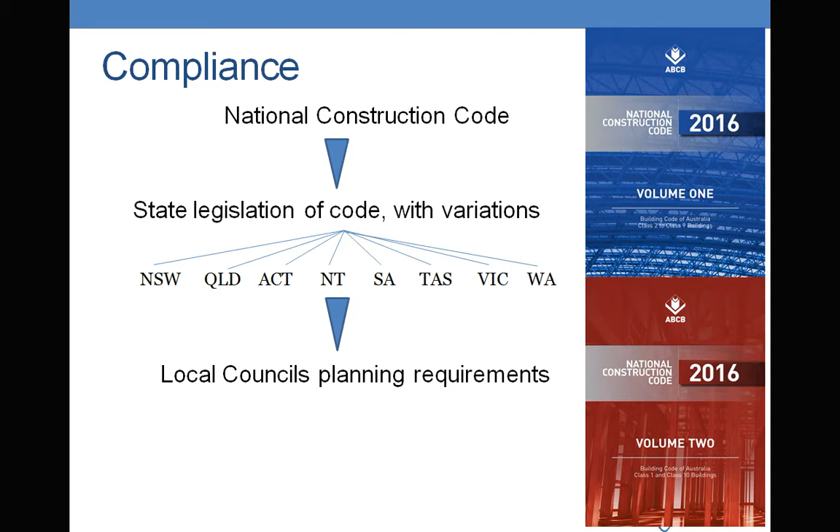So if we have a regulation, then what else do we need? We just build and everything will be done right. Unfortunately, the National Construction Code focuses on occupational health and safety. There's a small section on sustainability, section J, but the objective of the National Construction Code is about safety, about fire, about structural stability, about access when there's fire.

So, distances to exits, issues like that. So if I have a building, and at least I know it's not going to fall down, is that good enough? Not always, right? Because some clients want some quality. Some clients want the walls to be straight, not crooked. Some clients want the doors to have multiple uses and still be upright.

Example, a hotel, right? The door used in a hotel compared to a door used in a house is different. A door used in an education facility is different. So they have different levels of quality. And you as designers will have to make a decision, what quality do I want? So the specification is the document, it's the written word that outlines the quality.

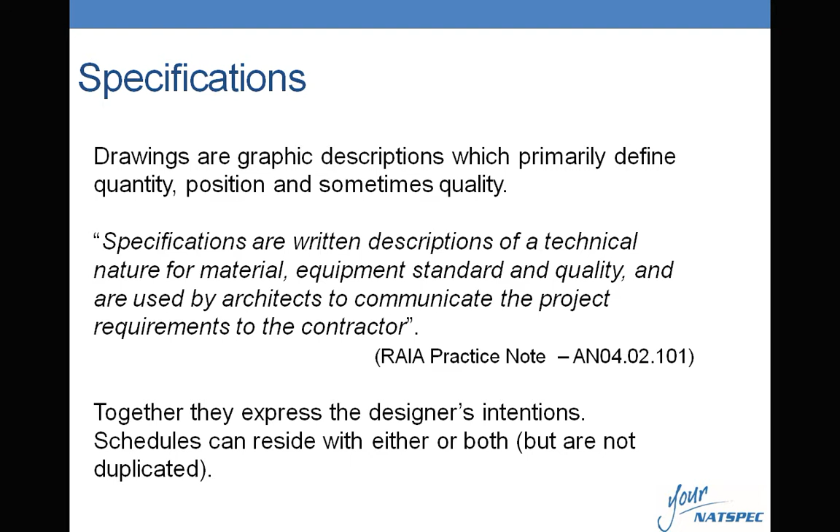Okay. So when you think of all the documentation, now including, say, the contract between your client and the builder, all of these things come together. They should not, under any circumstance, be in conflict, because every time there's something in conflict, it opens the door to what's called a variation, and every time there's a variation, there is an additional cost. So the main thing to remember is, in order to have quality, you must have a construction specification.

This is important. This is basically what I was saying, that it is about working with the other documents. It is about transferring your design thoughts onto paper. It is about complementing the drawings, not replacing the drawings, or the drawings not replacing the specification.

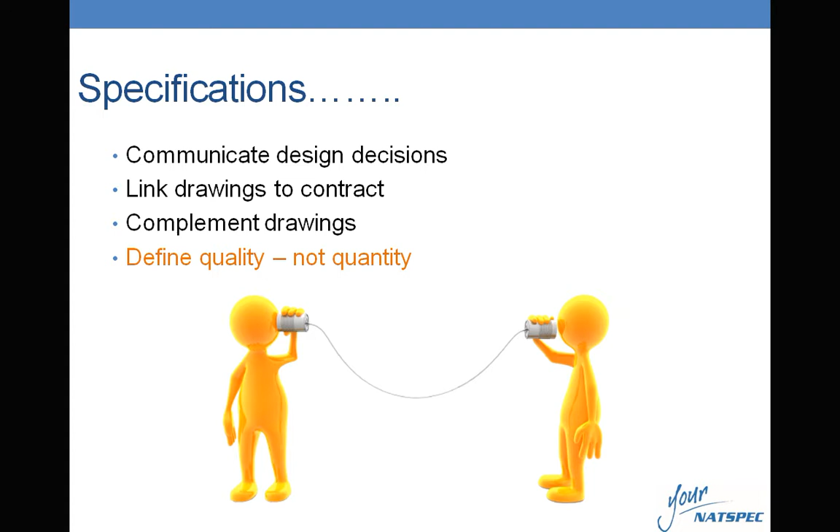Here's what, if any of you are going to become architects, note: you can finish architecture, and unless you're registered, you can't use the term architect. So if you're a registered architect, you will have to go through an examination, and part of that examination is on your documentation abilities. So it's important for you as a professional.

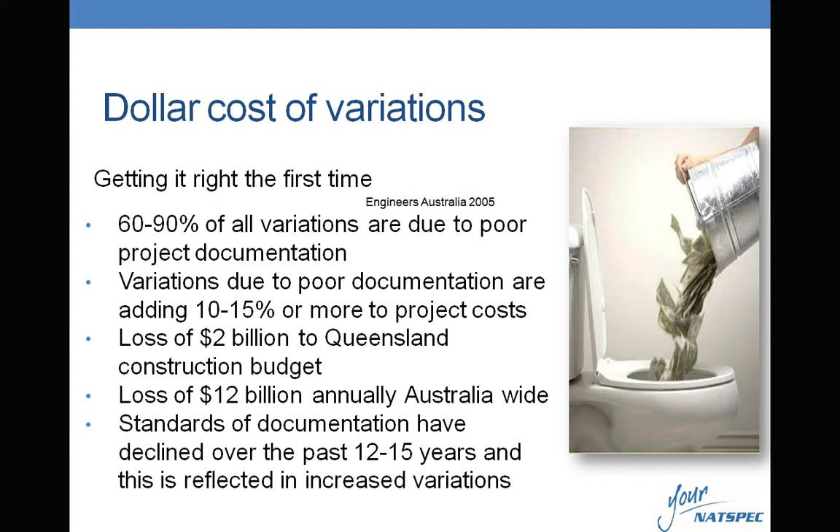So getting your documentation right saves money.

Okay, when you become an architect, or you're not one yet, when you will become one, you'll think back on what did I study? What were those subjects? Oh, we learned about windows and glazing, heat gain coefficients, or funny stuff like that. But what did you enjoy? You enjoyed drawing. Now, I don't even know if you do drawing nowadays. Maybe it's all BIM. You're doing BIM or you're doing drawings, or you do both? Both. Good on you. Right.

Playing around on computers is really not my thing. So drawing board's great. You do the drawing, you enjoy the drawing, right? And unfortunately, if something goes wrong, you go along to court and say, oh, I did these drawings, spent all my life on these drawings, and the court says, well, I'm sorry, the specification takes legal precedence over the drawings. That's a biggie, because as professionals, we tend to spend more time on the drawings, not on the specification. But in the eyes of the court, the specification takes precedence.

Why? John said this, I usually tell the story. In my family, both my sisters and my brother are lawyers. Anyone here know lawyers? Yeah, quite a few. No, you say the word lawyers and they smile. The reason is they're an argumentative lot. They can't agree on anything. So we have dinner and they're just bickering over a word. So their whole life is about words.

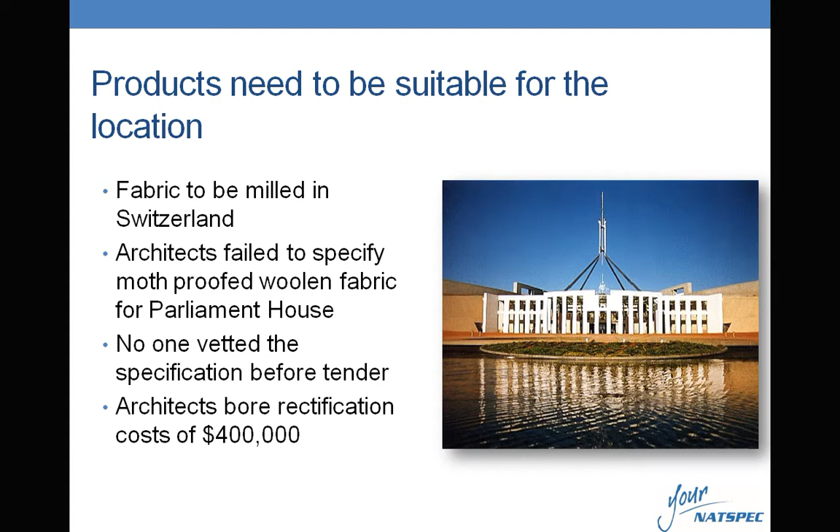So when you're using a proprietary product in your specification, is it appropriate for the location, is what you've got to ask. There are temperate zones, there are tropical zones, there are cold zones. You have to say, yes, I've got a lovely product, but is it suitable for this location?

The other thing you've got to think about is, can you get it in that location? So if you're designing a building in Darwin, or you're designing a building up in Cooktown, can the product get there quickly and economically? You'll have to think about that as part of your design decisions.

And the other thing is, even when you've chosen a product, you will have to allow for substitutions. Because let's say it's a really common product, but everyone's ordering it, and the builder comes back and says, well, if you want that product, we're going to have to wait for six months. You're going to sit there for six months doing nothing with a holding cost, and on big projects, it could be $1 million a month in interest payment. You're not going to sit around for six months waiting. You will need to look and work with the builder to find something to substitute.

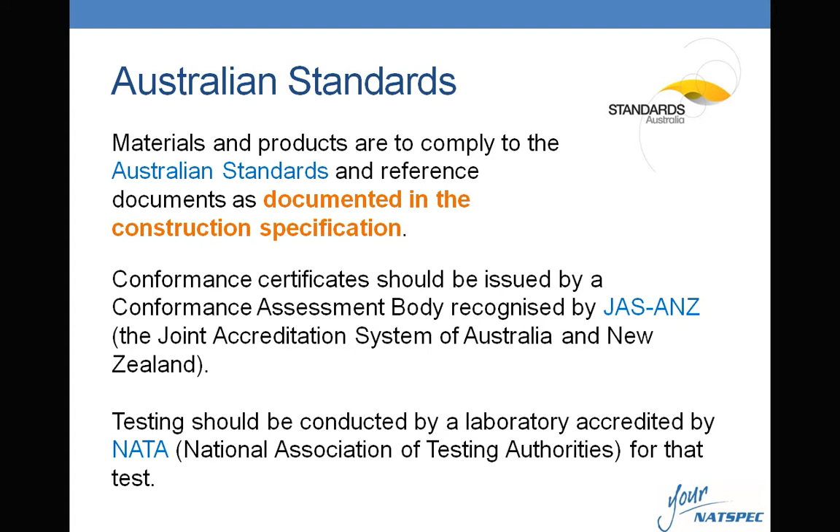So we reference Australian standards, we will reference industry documents, we will reference overseas standards as well, if that's necessary. When we call up a reference standard, we will put in there that we have the right to look at the test certificate or the conformance certificate for that product. Doesn't mean we look at them all, it just gives us the right to look at them. In Australia, the main conformance body to work around is JAS-ANZ, so they accredit conformance assessment bodies, and NATA, National Association of Testing Authorities, accredits laboratories. You can be a NATA accredited laboratory for this standard alone, so you've got to watch out. Someone can say, oh, we're NATA accredited, but not for the right standard, so you've got to be careful.

June last year - in fact, I was in the UK when that happened. And unfortunately, 71 people died. Now, in both instances, the cladding, or the cladding detail, contributed to the spread of fire. It didn't start the fire. There were a whole lot of other issues involved, but in both cases, it is clear that the cladding system contributed to the fire.

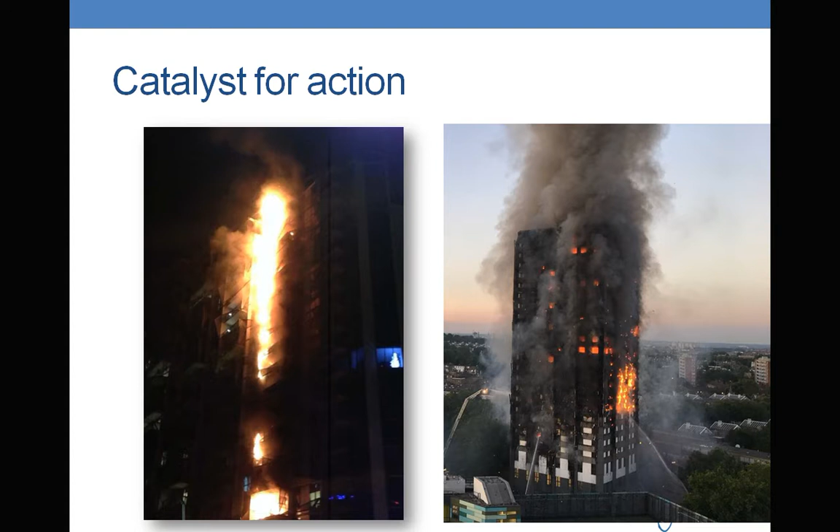Politicians will say it was the same - they're totally different, the detail was totally different, but it scared everyone. This one worried everyone, no one died. This one scared everyone. So I sit on government committees, and I can tell you, suddenly it became the main thing, and suddenly there was this focus on non-conformity.

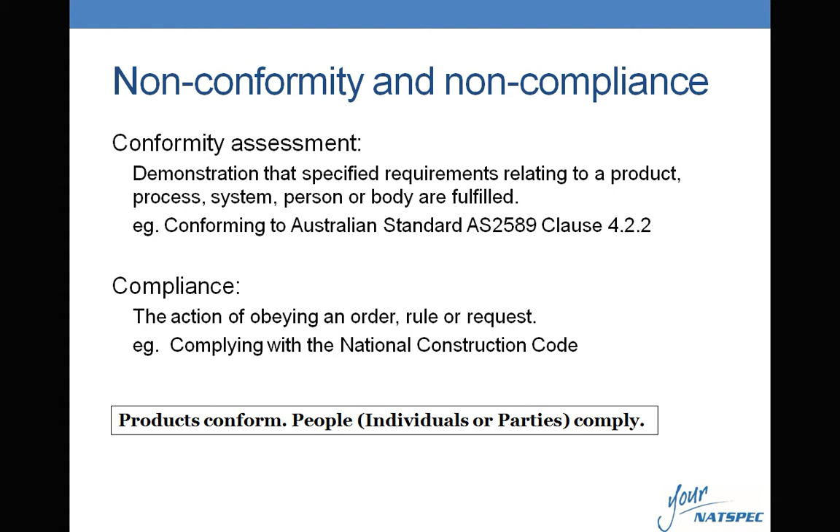So non-conformity, we're talking about products conforming, and non-compliance, we're talking about non-compliance to the National Construction Code. So it is a big issue with regard to substitution of products that either do not comply or do not conform. In your specification, you have the right to reject. So it becomes very important for you to document it correctly, and reference specifying is one of the cleanest ways to give you protection.

An example is this one - this is one of my projects. John knows this. Before I worked in architecture, I started in engineering. Okay, so the professions aren't always that friendly. So some say that I came from the dark side, others say I went to the dark side - it depends which hat you're wearing. So here's a project, I was, I think if I remember correctly, 2 years out of uni. By now, if you're observant, you would have seen that I'm Chinese.

So Chinese are very lucky, I can lie about my age all the time. But the trouble is, 2 years out of uni on a building site, I still look like I was 13. So you're trying to tell people what to do, and you had to learn how to make it work for you. This particular case, I designed a building, 12,000 square metres, equivalent to 12 floors of a multi-storey building. They brought all the pre-stressed steel. Have you done post-tension and pre-stressing?

Rubber band - pull the rubber band, block it off, close it in, and the concrete's stronger. The trouble is, it's not rubber, it's made out of steel, and if it breaks, it can kill someone.

This happened to a director of mine. He told me a story on his site - he wasn't there, but it happened. The cable broke when stressing, it whipped out the jack, went across the road and cut through the roof of the car across the road.

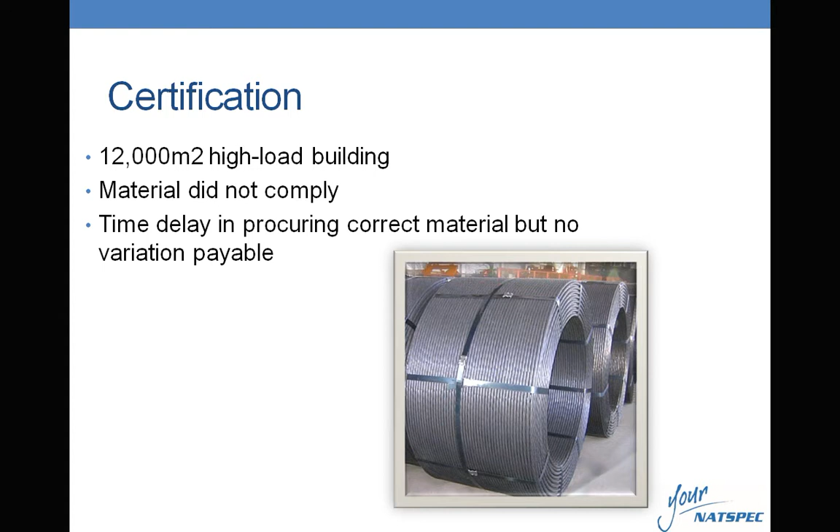Unfortunately, it was a very reputable company that had provided this steel. The fact that they were reputable wasn't enough - they were not able to show me the certification. I was not going to allow someone to die on my site. End of story. So, certification is a powerful tool for you as professionals.

In fact, it's not only not having certificates - we've got issues of false certificates coming into Australia. This is an Australian Window Association certificate here, which they say is fake. Because it's a digital world, I can download a certificate and just change what I want. So watch out for that.

In fact, we created a register - that's our website, that's the box. The whole idea of the construction register is to increase the amount of trust and the amount of verification systems in Australia. We're really doing it as education - to remind people you have the right to ask for it.

It's free for designers to use. It actually was launched this month - it's been live for about 9 months, we've been testing and improving and all the rest. But it's officially launched this month, and it is being supported by government departments.

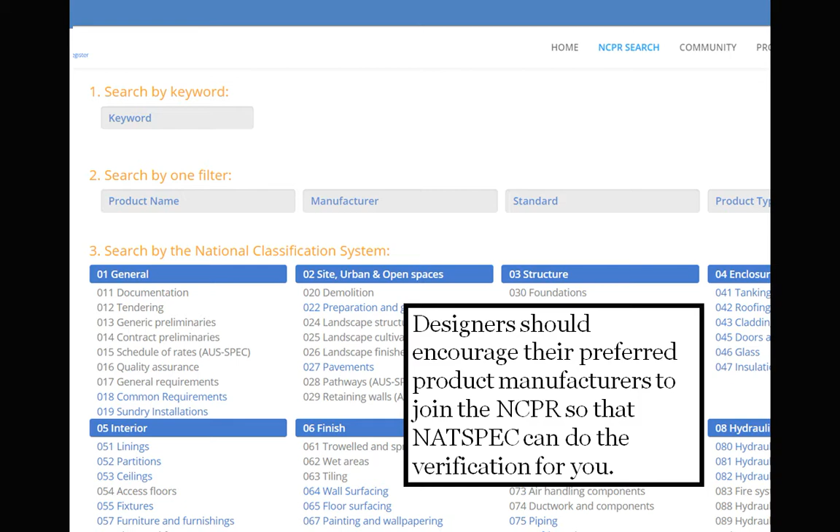Once you're a designer, if you don't find the product on that list, we recommend you tell the manufacturer, hey, why aren't you on the list? Go do it. It's not expensive.

The next form - so we had proprietary, then reference, and now performance specifying. Performance specifying is what is the performance you want. That's why you have schedules, that's why you have the property sets that you have in schedules - because you're saying you want a certain amount of acoustic, a certain amount of shading, a certain amount of whatever. So you say, what is the performance of the material that you want?

Tolerances is the easy one. You've got tolerance, oh yeah, make it plus or minus 5 millimeters - that's great, not always. So if I have this door and I give it a plus or minus 5 millimeter tolerance, but it's always 5 millimeters too large, it's not going to fit in the door opening. Because if you've said it can be 5 mils bigger than the door opening, you've got a problem. So sometimes it's 0 plus, sometimes it's 0 minus, sometimes it's plus and minus. You'll have to think about it with regard to your project, with regard to what the item actually is.

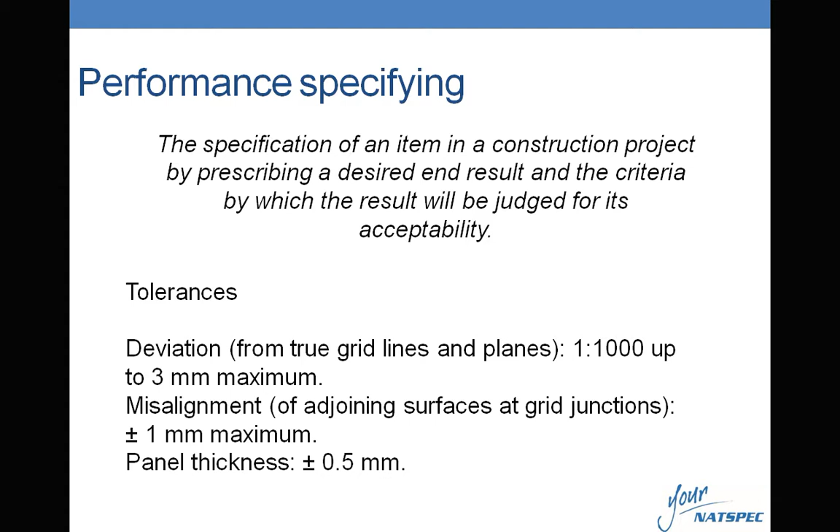And the fourth one, descriptive specifying. Who likes to write essays?

Essay writers. John, you're supposed to put up your hand.

No, normally it's only the lecturer, but sometimes not. I did have 3 people last year in one class, that was the record. But generally we don't write essays in this profession, and if you do write essays about your quality control, remember my sisters and brother are lawyers, they'll find gaps in it.

So those 4 ways of specifying are actually quite simple, but it's hard if you start from scratch. You're a brand new architect, you've decided to open your practice, and you're lucky if a family member gives you your first job, which isn't unusual. How do you start? Most of us nick it from someone - you go into a new company or ask a friend what they're using, and you go from there.

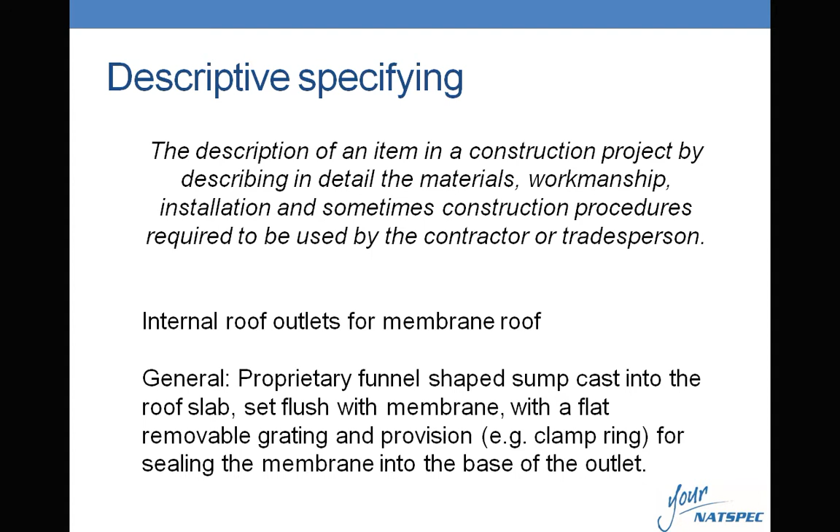Or you use a system like NatSpec, which does it for the industry as a whole. Each country has its own national specification system.

That's just the warning, that's why we track information for you. I tend to use these old slides because they're actually quite good, and these are friends of mine - Gary's retired now. Regulations and standards are changing all the time. Are you supposed to keep up to date with everything? No, it's too hard, so that's why national specification systems exist - developed by the industry of that country to do the tracking for professionals.

There's a good example of specifications being changed by technology: cross-laminated timber. You may be fully aware of it - in Australia it only came in 3 years ago, though it had been used in Austria for many years. We now have 2, maybe 3 cross-laminated timber factories in Australia now.

Or technology - there you go, that's machines building a bridge with a 3D printer. I'm not going to walk across it yet, but they can do it now.

I've got a video I received last week from a friend, of a gallery with beautiful curves over the whole space, designed in BIM. The BIM went straight to the cutting machines, then machines put it up, and on site there were only 3 people doing this whole cladding of a great big gallery. So technology means the industry's changing.

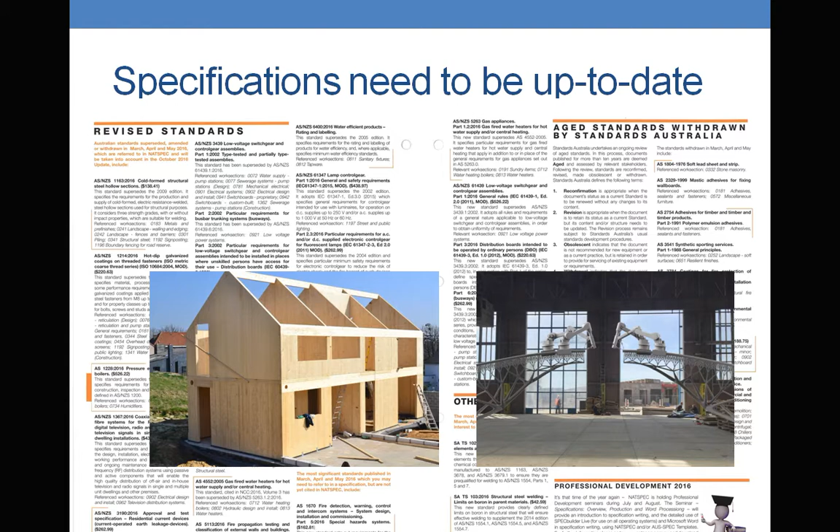So we try and track all of those things for you. There's 20 of us, and we deal with whether you stay in architecture or move to landscape or interiors, or even do simple domestic work - we've got information for you.

One thing to remember is, how do people find information? If I put taps under T, maybe everyone will find taps under T, but then my washers are under W - now my taps and washers aren't together. So in each country there's a national classification system. In Australia it's the NatSpec classification system. It's funny, I'm a globalist, but the Australian industry wants to stick with what it's got for now.

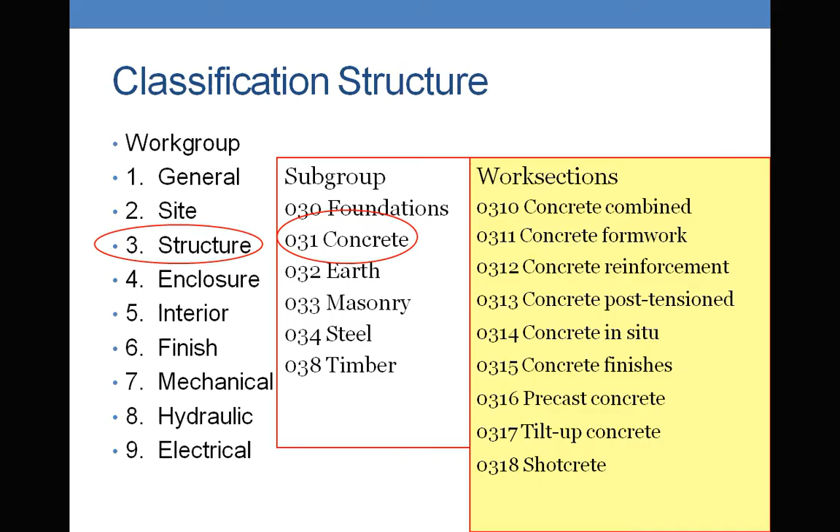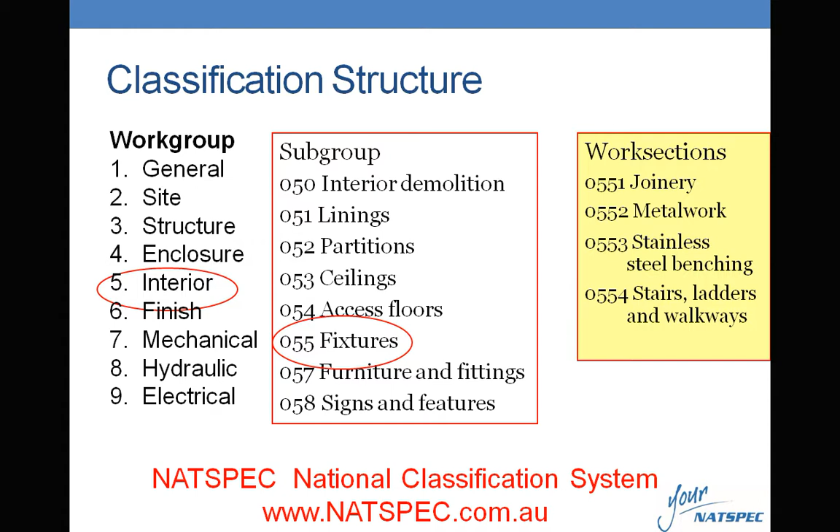If I look at something here - it's an interiors one - we've got what we call work groups, and then we divide it into little bits, let's say fixtures, and divide those into further bits. So we have a tree system for classifying information in the building industry. You can go to our website, download it, just use it. It's worth looking at to see all the topics and how you'll be using them when you become professionals.

This work section structure - general, products, execution, selections - is pretty international, nearly all countries have the same structure. But as I mentioned earlier, selections may reside on the drawings, within the specification, or you may keep them separate. That's up to you, and there's no hard and fast rule.

I have never put a window schedule in the specification - window schedules for me are on the drawing. But I've got a person in the office who always puts them in the specification. So it's your choice. The important thing is to ensure you've got the classification system so everyone knows where to find it.

Sometimes the classification system gets a little bit confusing because you've got something that, well, I need it for this, I need it for that, and I need it for that. The rule here is put it under common requirements. Don't put it in three times.

Why? Because we often change our mind during the design process, or we may be influenced after it's gone out to first tender and we want to change it to either bring down the price or whatever. If you've got it in three times, you've got to remember to change it three times. Because if you don't, you're opening the door to a variation, you're opening the door to additional costs. So we create common requirements, and common requirements is where you put that type of thing.

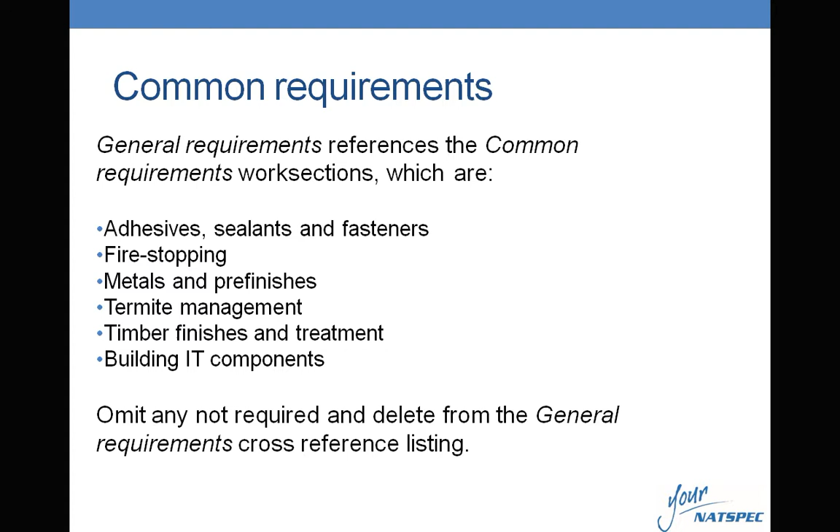Now, there's some examples. Timber finish and treatment, put it in one place, okay? Because you may have got it for your joinery, you may have got it for your floors. Just put it in the one place, okay?

Big rule, that one there: all work and materials are to comply with the BCA and all relevant Australian codes and Australian standards. Not good enough. Been thrown out of court. Why? Because within an Australian standard, there may be multiple choices. There are tables in there where you will be making a decision. Is it Class A, Class B, Class C, as an example. So you actually have to make choices within the Australian standard.

To industry standard, there is no industry standard. Or at least there's no way to measure industry standard.

Right? So if I said, okay, write an essay to the average ability of this class in English, how good should the English be? Now, you're very good, so it's up here, but if it was my class, it would be down here. Okay, not that great at English. I'm good at Australian, but at English, I'm failed at grammar stuff.

So to industry standard, as appropriate really doesn't mean much. It's a nice touchy-feely thing. As required has a problem. As required by who? As required by the builder, he doesn't require it, take it out. As required by who is a problem, so you can't just have as required.

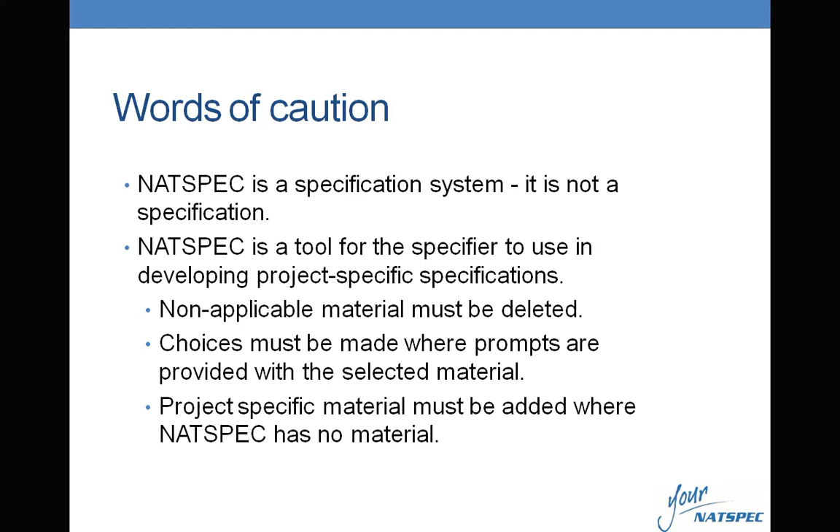Sometimes it's harder. You'll have to make choices. Is it Class A, Class B, Class C? We can't cover everything because you may decide to create something we haven't thought about, so you'll have to be more specific about what you want.

We do try to help you though. We put guidance in our documents. For those pretty good with Word, there's that double dash looking thing that turns on and off, where you can see the indents. Well, it actually turns on and off guidance text. So we have guidance text or hidden text in our documents to help designers make decisions.

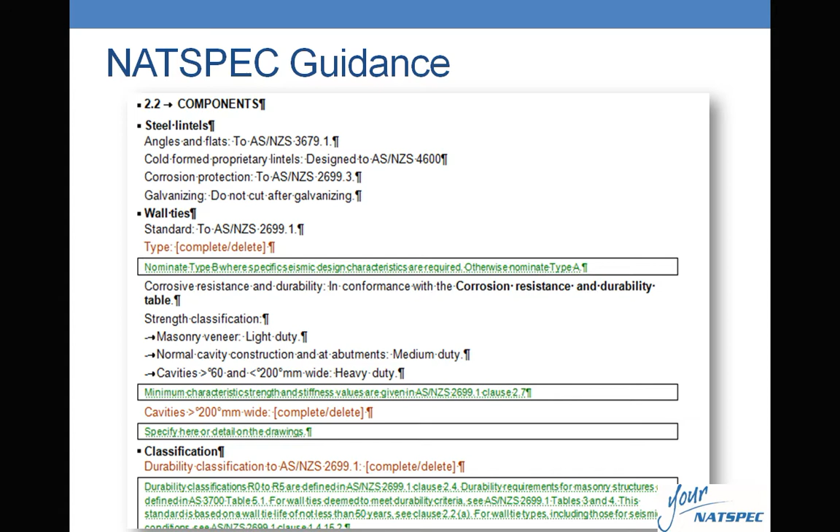You will be asked to log in, so it will ask for your email address. I've been at NatSpec 13 years now. We have never used those email addresses. It's not a marketing ploy, it's a safety ploy. If we've got something wrong, we need to tell you we've got it wrong. Knock on wood, we haven't had to, but that's why it's there. We need to know that if someone's downloaded it, we need to go, oh, don't do that, here's the latest information.

John, have I got time to quickly go through this? Because that was the end of the spec bit. Okay, building information modelling, everyone, well, quite a number of you nodded your heads before. You've heard about that. It is here.

You get a lot of designers that say, oh, we haven't moved there. Sorry, all major project designers have moved to building information modelling. That definition, which you'll get when you get a copy of these slides, is from the European Union BIM Task Group this year. I've actually pushed a number of organisations I'm working with to adopt that definition of BIM. Why? Because building information modelling, the word building, should be treated as a verb and not a noun. It's the act of building.

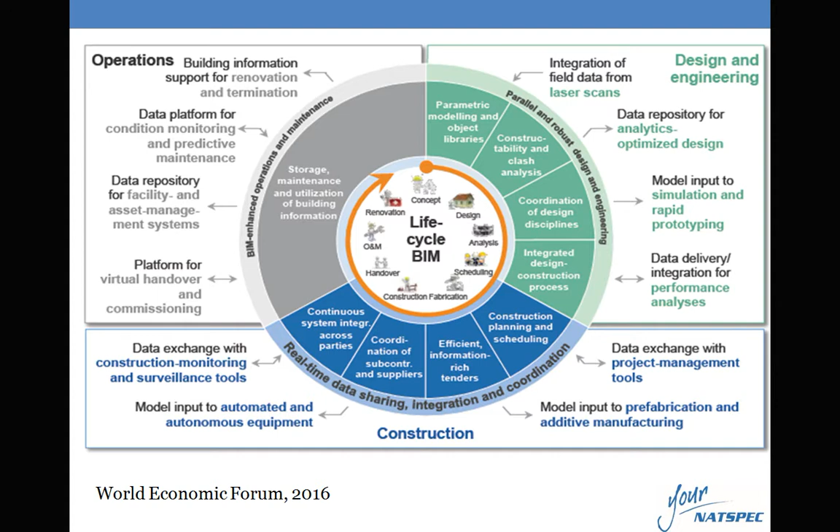So you can use the model all the way through. I want you to remember it's the information that's important, not the model. Building information modelling - it's the information that's important, because the next era of BIM is about project databases. It's where you take information through the life cycle of the building, you have it there, and that information can be used by multiple people with multiple softwares for what they want to do. And that's what BIM is. It's about the built environment and information.

In fact, for my sins, I work with all of those organisations on BIM. The Australasian BIM Advisory Board is a joint thing between the Australian Procurement and Construction Council, being government, and the Australian Construction Industry Forum, being industry. So once again, government and industry working together. We are releasing 2 new documents this month, one on project consistency, the other on asset information requirements.

Building Smart Australasia is part of Building Smart International. They develop what's called Industry Foundation Classes. We're working with the SBE NRC, which is about value add. Collaborate, which is predominantly engineers working on base terminologies. AMCA, which is mechanical engineering, setting up a library of objects. Australian Institute of Architects - I've been on all their steering committees and a number of others.

In government - where's government? I'm sitting on the Victorian government digital strategy. We have a signatory with the China BIM Union, so it's a global thing with international standards, with Australian standards, FMA. And for my sins, I'm international president of that group as well.

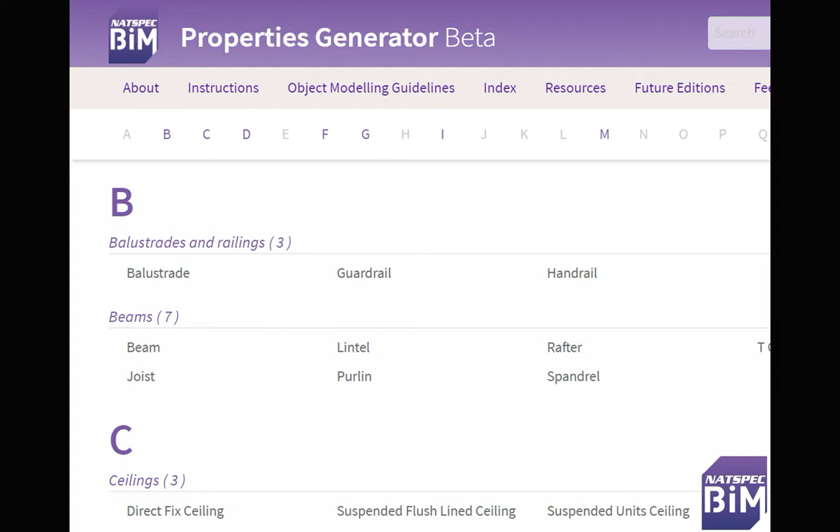This year we released a properties generator. It's just IFC, it's just an easy way to find it. So you click on BIM and it will give you all the things you need. And in fact, Building Smart International asked us to present on this last week, and I had the Swiss people come and visit us to work with us on this as well last week. Put door, and it'll come down with all your definitions, and you can choose which source.

Have you heard of COBie? Don't worry, I don't use COBie. But these sources, property categories, all the rest of it, it's about consistency. So if you are going to make a BIM object, you can download the property sets from here and put it in your object and be consistent. That's what it really is.

Okay, the detail's the detail. I don't get it — I come from drawing board day, I never even used CAD. So, as far as what I was saying before, you know, we as designers, we all specialise in different ways.

The Open BIM Object Standard is about how all your objects should be made. We developed this with New Zealand. It has had interest from another three countries already, and we haven't released it yet — it will be released this month. It's actually at the graphics stage. So there's an Open BIM Object Standard which works around IFCs.

We are working — and this is important for you because you will do work for different governments, as I said before, a lot of you will work nationally and internationally. We are getting all the different governments in Australia to start asking for the same thing. Currently, they all ask for something different when it comes to BIM. We've had agreement from them that we will work to coordinate and collaborate to get one framework.

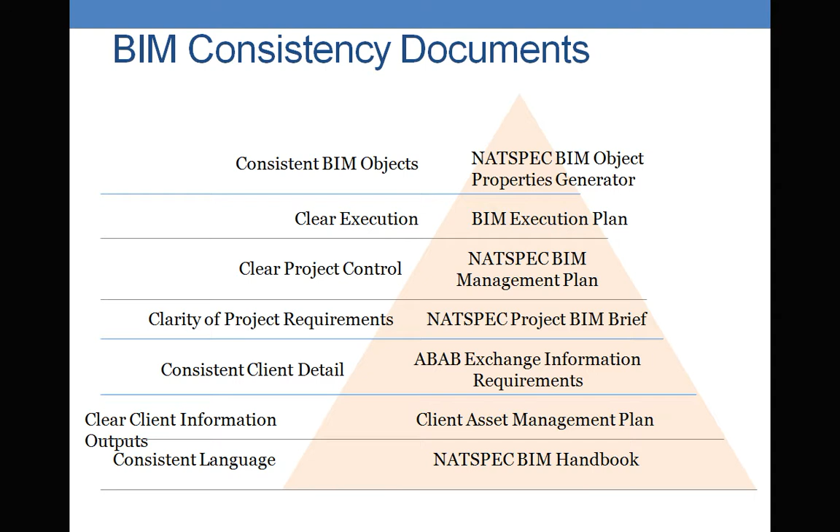As I said, that one's only being released this month. That one's released, but the standard around that's only being released this month. So we're in development, we're in development. That's it. Okay, documentation — it all works together, whether it's on the drawing board, whether it's CAD, whether it's BIM. Your documentation includes your contract, your specifications as well. Thank you.